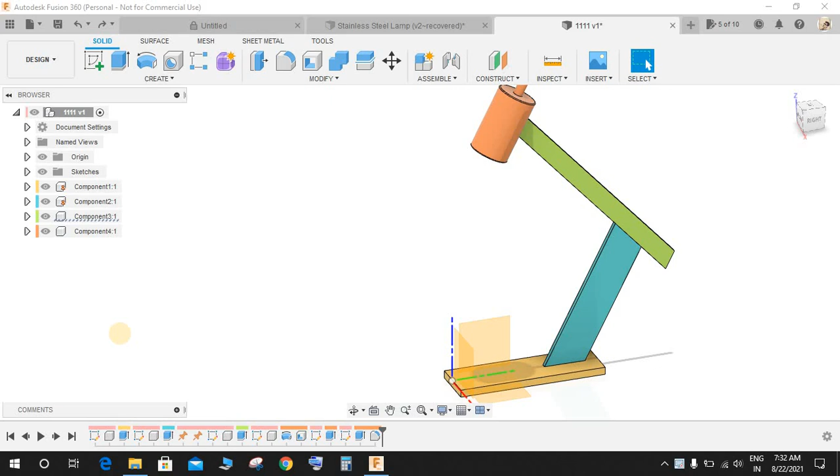So we are making this beautiful lamp assembly here. For till now we have completed all the base, this frame, and the cup holder. Now only thing left is to make this wire, the glass, and the filament. So without wasting any time, let's get started.

Press shift and N to enable the colors. Now what I'm going to do is I will be making the bulb. So for that, go to create a sketch, and on the center plane we will be making a sketch. Just hide the bodies for now, like this.

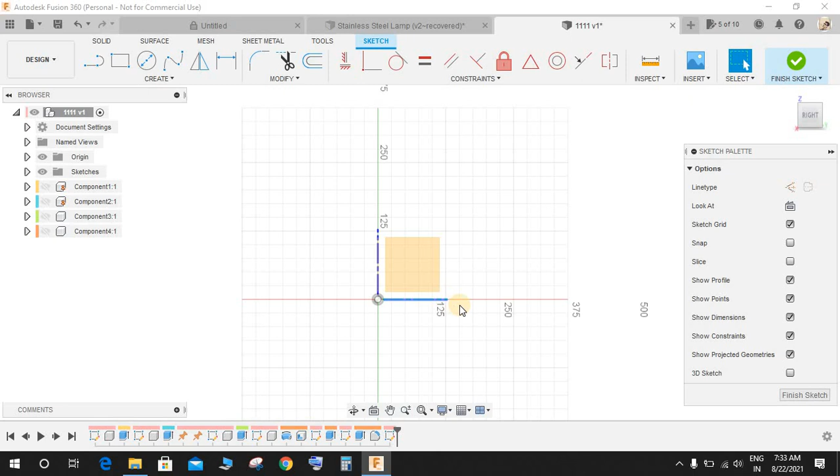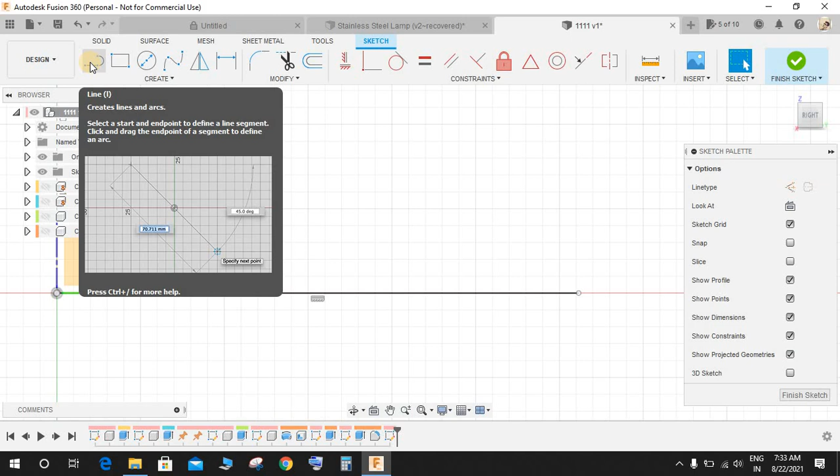Move a little bit here, draw one horizontal line like this, and start by making some sketches. Press line, and somewhere here draw upwards a line like this. Just draw a profile like I am drawing, so like this and this.

Now press D for dimension, give this a dimension of 14 mm, and this one a dimension of 18.5, like this.

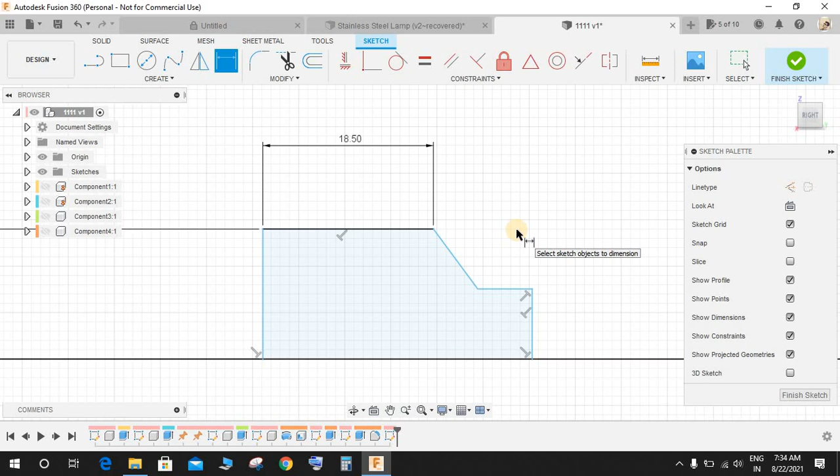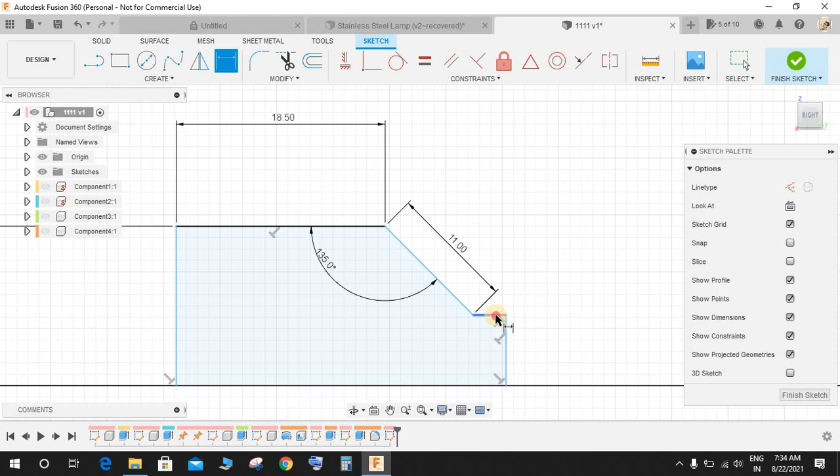And the angle between these two is going to be 135, and this dimension, just delete this, press D again, and this dimension is going to be 11 mm, like this, and this one is going to be 1.5, like this, and this dimension is going to be 6 mm. Of course, it will automatically assign it.

Now once done, go to finish the sketch, click on revolve, select this profile, and axis would be this. This is going to be our new component, and press OK.

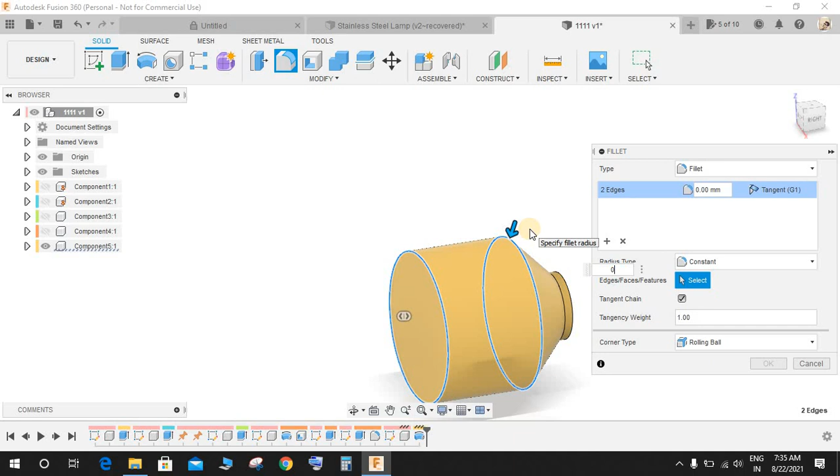Now once done, press F for fillet, select this line, and give this a radius of 0.8 mm, and again go to fillet, select this one, and repeat the same 0.8 and press OK.

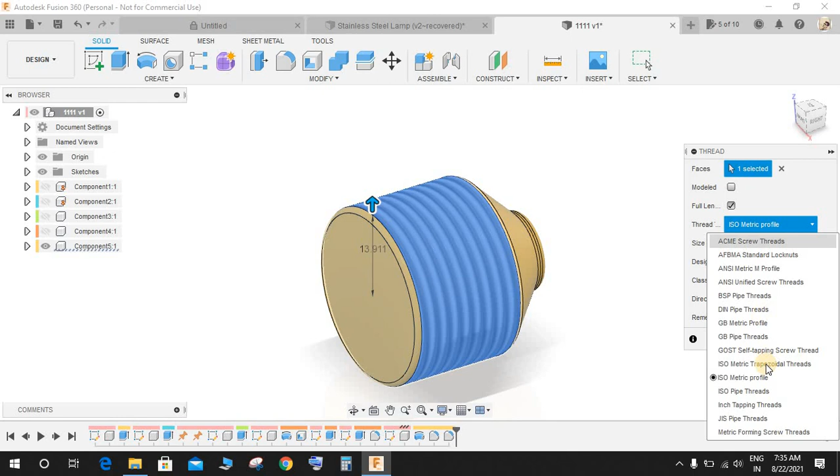Now once done, go to create, go to thread, select this face, and select any profile that you want the type of. I'm going for the GB pipe threads, like this. Remember it to be modeled, and press OK. So now we have a beautiful thread structure here.

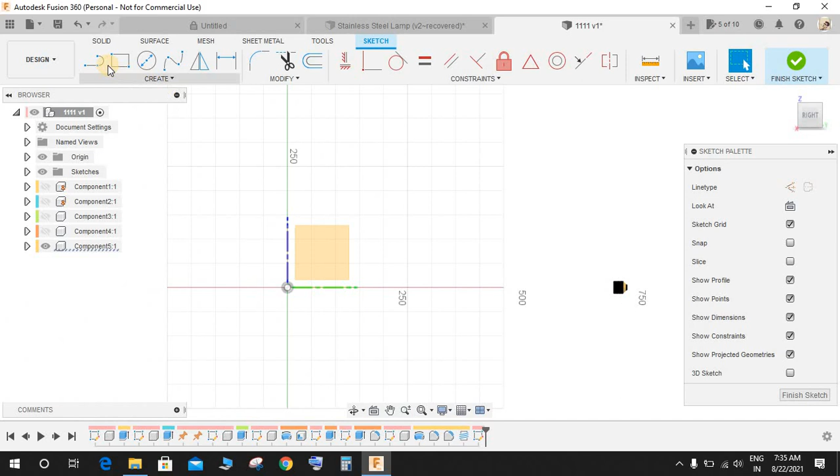Now again go to create a sketch, and on the front plane again we will start by making some lines. So again draw one horizontal line like this, passing through the center of this profile.

Press P for project and project this line like this, and draw a structure like I am doing here. From this point, draw a line like this and join it here. Press D for dimension, length is 27, and this point to this point is going to be 5 mm in distance.

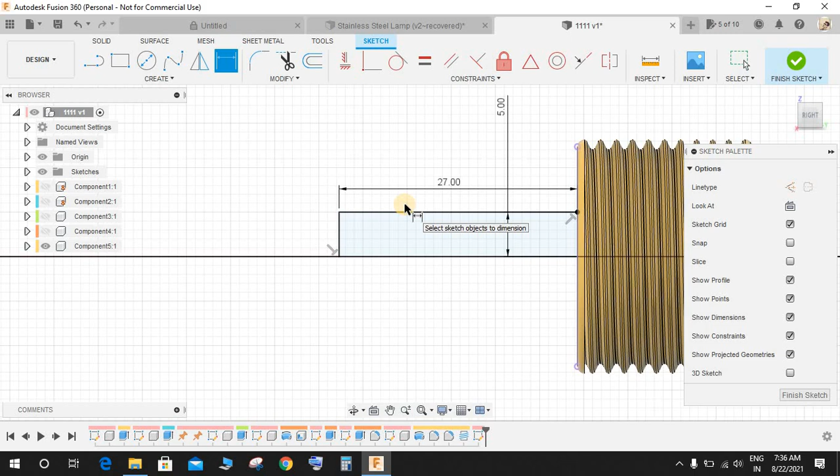So the next thing is to again draw a line like this, and this. Press D for dimension. This is going to be 2.3, and this is going to be 4, like this.

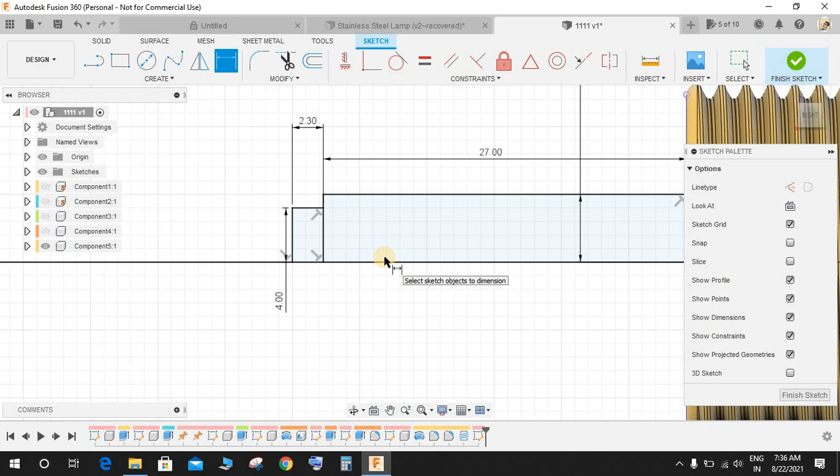Now again make a line, half line here like this. Press D for dimension, and this for this is going to be 7.5.

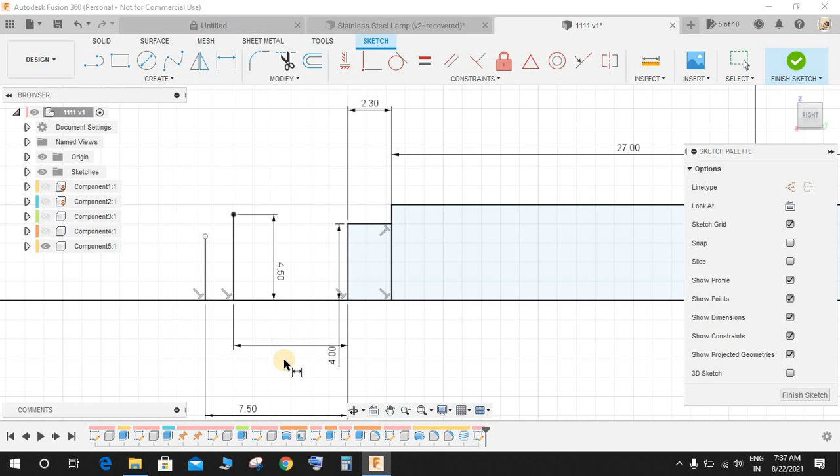Now draw one more line here, press D for dimension and make this 4.5 mm long, and from this point to this point make it 6, like this, of course.

And now go to fit point spline, select this point, and this point, and press OK.

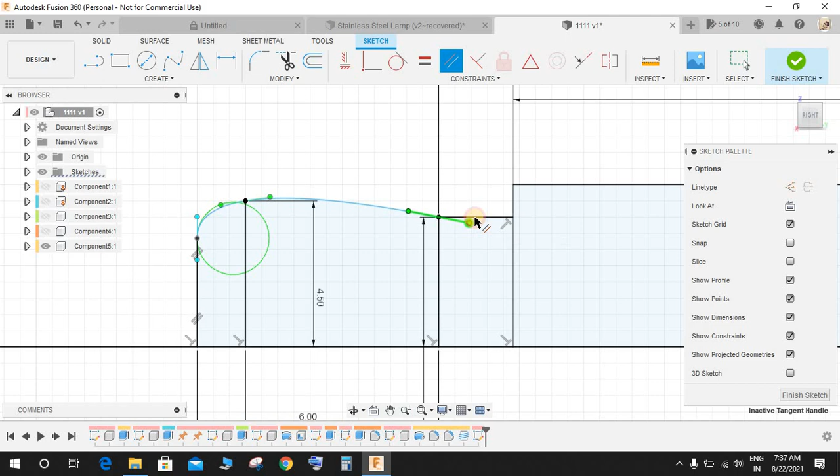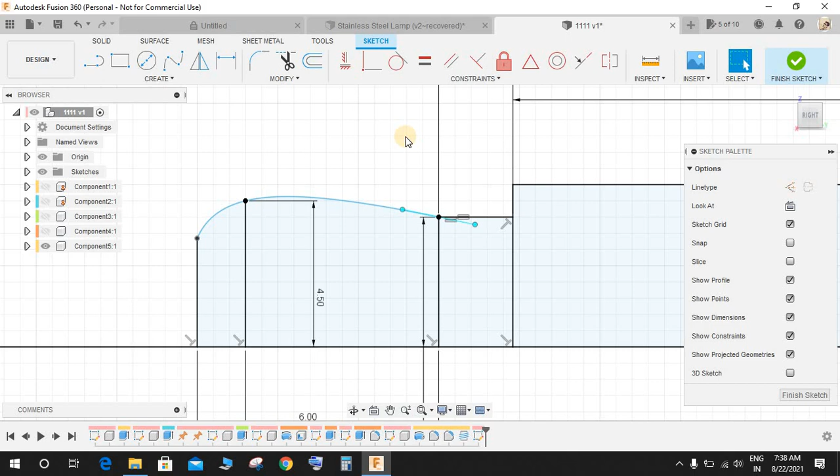Now go to parallel, select this control point and this line, so make it parallel, and this line, no, just undo it. Make a line like this from here, right click and click OK. Now this is going to be parallel relation with this one. No, not equal. Go to parallel relationship between this profile and parallel relationship between this profile, so we have a beautiful curve like structure here.

Now again draw a line from this point straight towards this, like this, and press D for dimension and make this as 40 mm long, and the dimension between this line and this line is going to be 1.4.

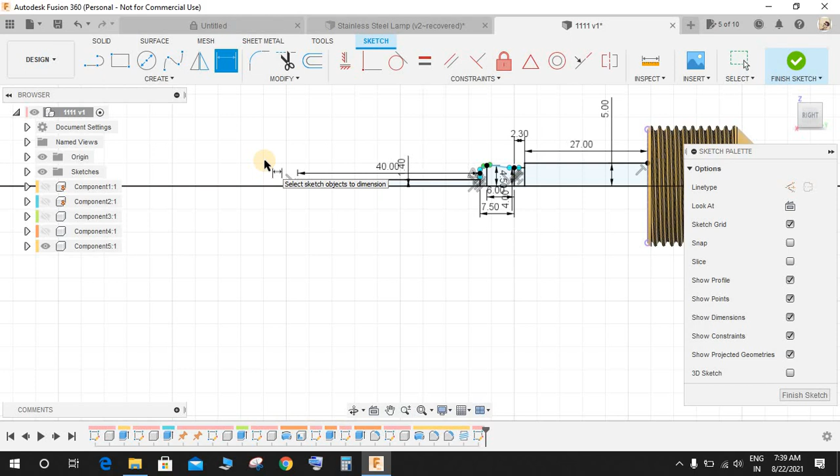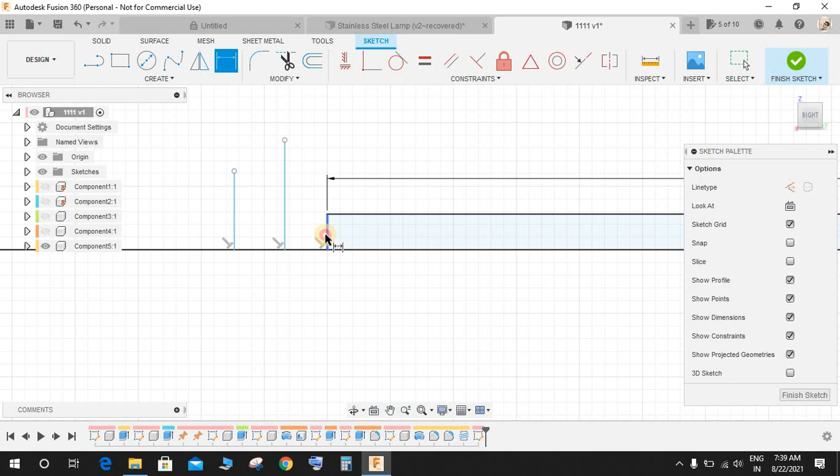Now once done, I'm going to make another line like this, and make another line in the center like this. Press D for dimension, and from this point to the outer line make it 3.5 mm, and the length of this line is going to be 2.5, and the length of this line is going to be 1.5, like this.

Now once done, again go to fit point spline, select this point and this point, and click OK. This time we don't need any dimension, just make it a little bit more curvature, make it parallel like this, and leave this part of the line as it is. Once done, you may finish the sketch.

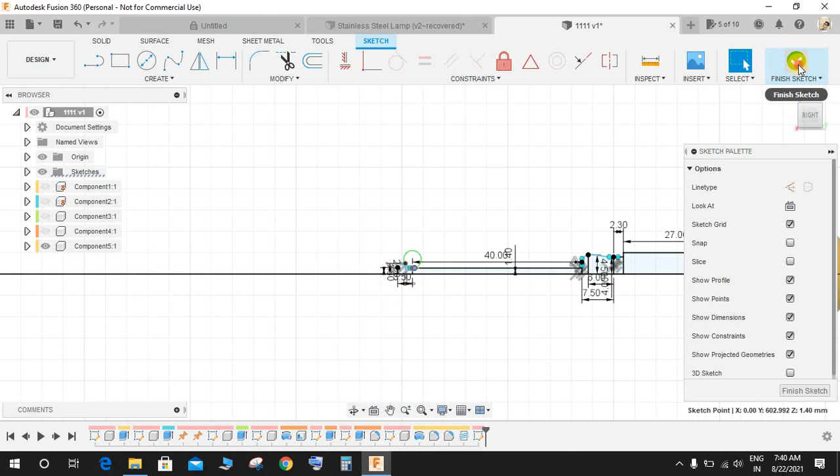Now again go to revolve, select the profile, select all these profiles that we have just created, and the axis of rotation would be this. This is going to be our join operation, and press OK.

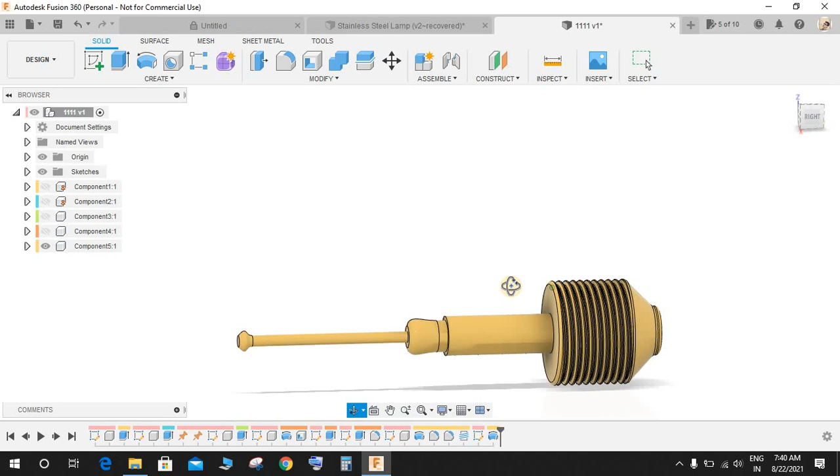Like this, of course. Again go to create a sketch, and on the front plane, start by making a circle somewhere here with a dia of 0.35... okay, 0.4, make it 0.4 mm diameter, like this. This is very small, of course.

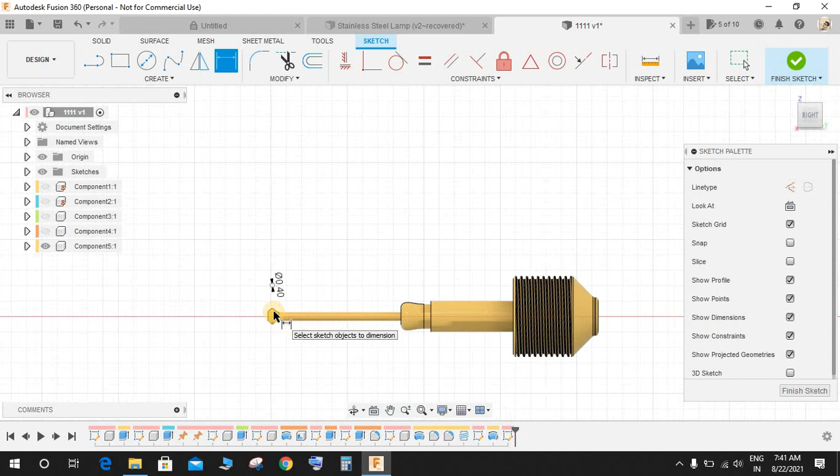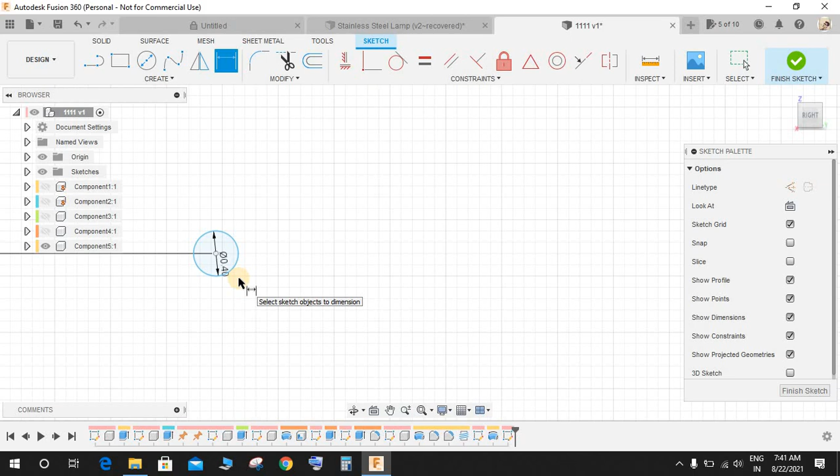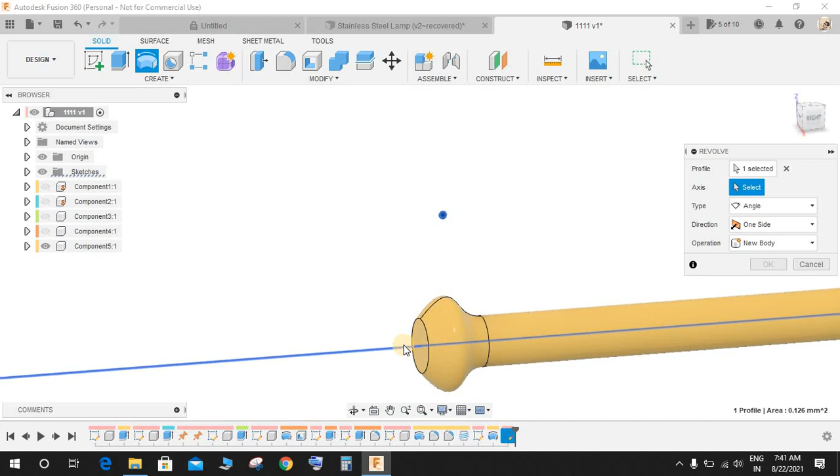Press D for dimension and press L for line and draw a horizontal line from origin, like this, and press D for dimension, and from this line to the center of the circle make it 7.2 mm. The dia is of course 0.4 mm, and the distance from this face to this one is going to be 79. You may finish the sketch. Go to revolve, select this, and the axis would be this, make it a new body and press OK.

Now the next thing is to make the filament. Click on create a sketch, and again on the front plane we will start by making some sketches here. For that, I'm going to click P for project and project this profile here.

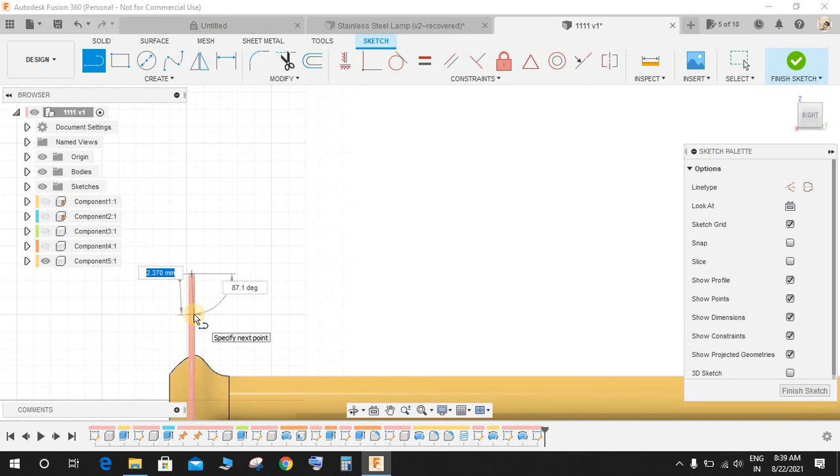Now I'm going to click make a line just on center of this profile like this, and click on slice to slice it like this, and click P for project and select this circle and press OK.

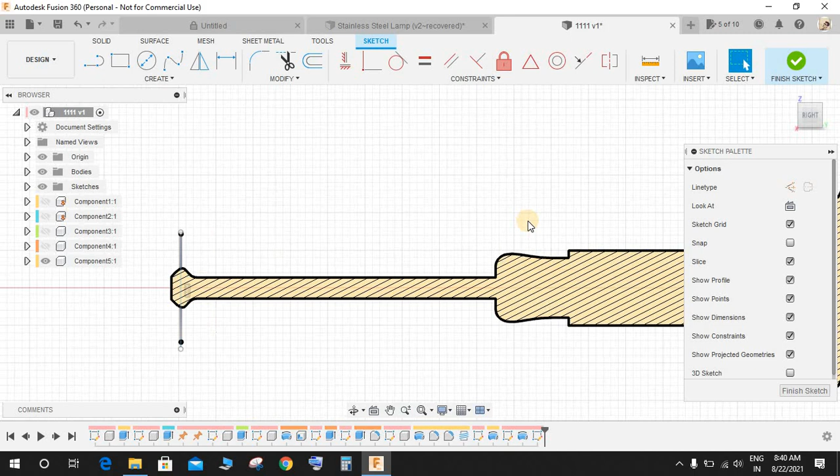Now we will be creating some sketches. For that, click on line and make a line like this. Press D for dimension and give it a dimension of 34 mm like this.

Then go to create, go to point, and make a point here. Press D for dimension and draw one line from origin that will act as a center line. Make a line like this from center, of course. Press D for dimension: from this point to this line, give it a dimension of 10.4, and from this point to this point, give it 6.5.

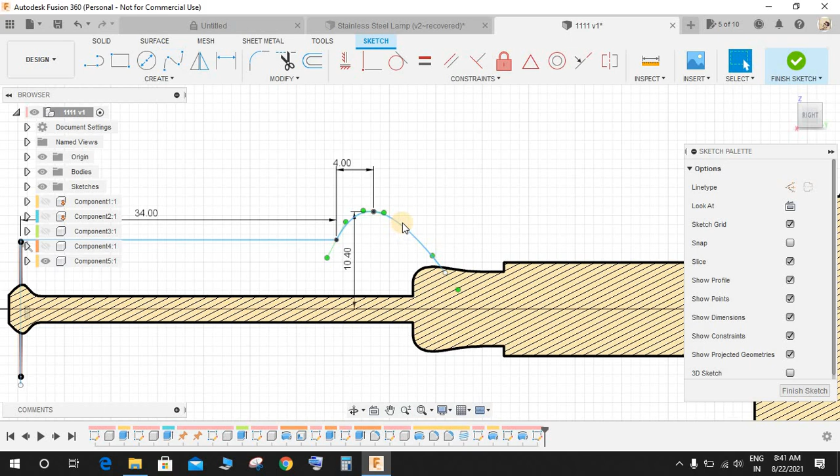Now make it 4 like this. Again, go to fit point spline, select this point, and make the third point somewhere here. Okay, let's make it 6 like this. Make it parallel.

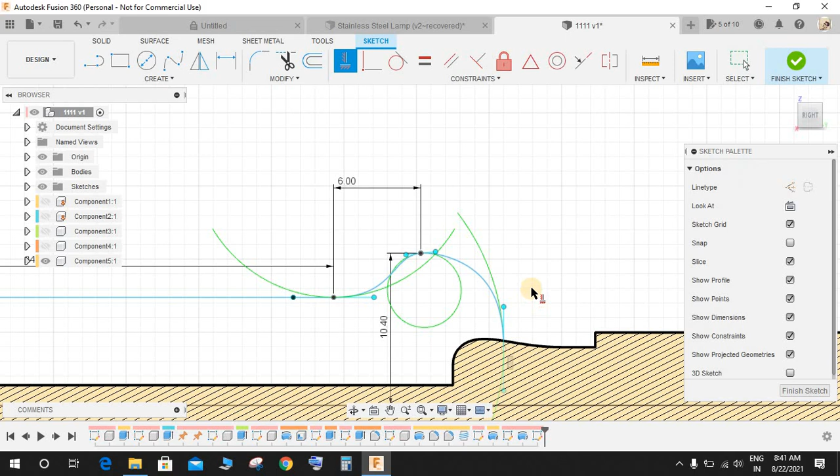From this point, just change - there is absolutely no dimension here, you just need to change it like this - and right click on this and make it vertical, like this. Now once done, make sure that this line comes right on center of this line, just like here.

Once done, delete this line - that line was just for reference. Now this is our line. You can change the orientation like this, and you may finish the sketch.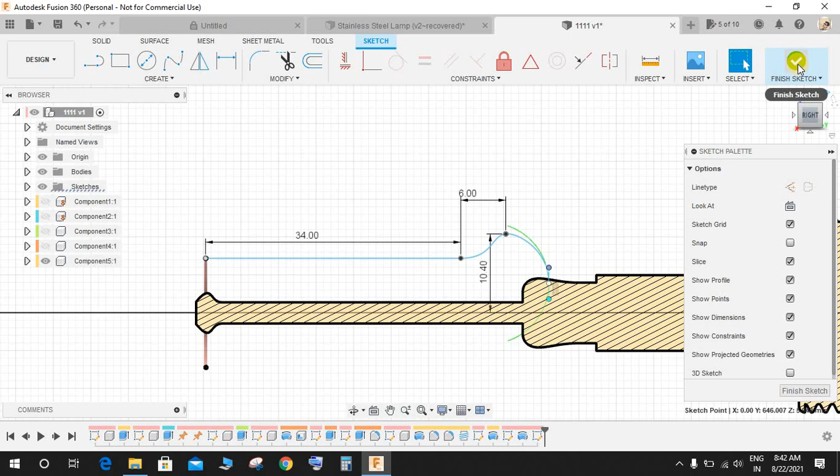Now what I'm going to do is go to create, go to pipe, select this. The operation would be join, and the section size, that means the dia, is 0.35, like this, and press OK. Now we have a beautiful structure here.

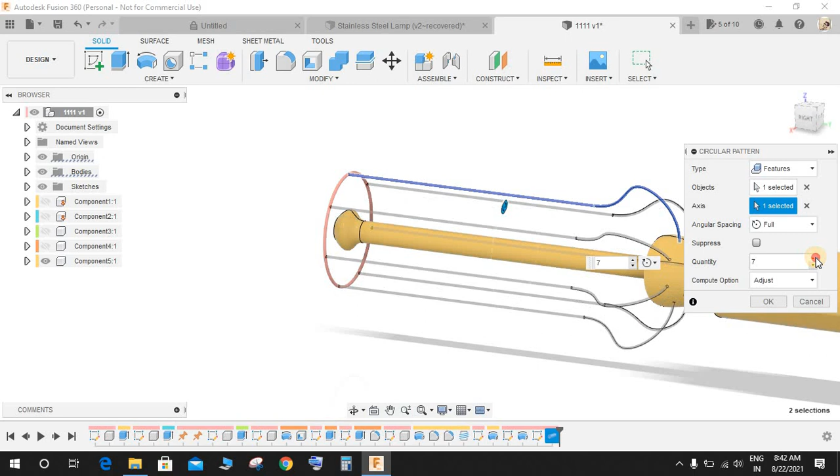Again, go to create, go to pattern, go to circular pattern, and this is going to be our features, and from the timeline select the pipe as the feature, and the axis would be the default axis, and the quantity would be 7, and press OK.

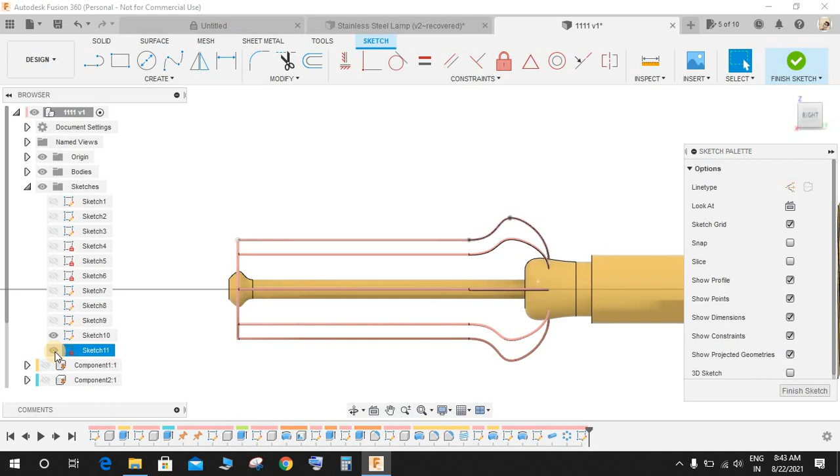Now the next thing is to make the filament. Press create sketch on the center plane, of course, like this, and bring back the last sketch you have drawn - this one was the last sketch that we have drawn. Now click on project and project this line here and press OK. You may hide this body for now, as we don't need it right now.

Again, click make a line. Remove project and select the sketch entity as this one. I don't know why it's not selecting. Okay, let's make it like this. Draw a line like this, don't project it.

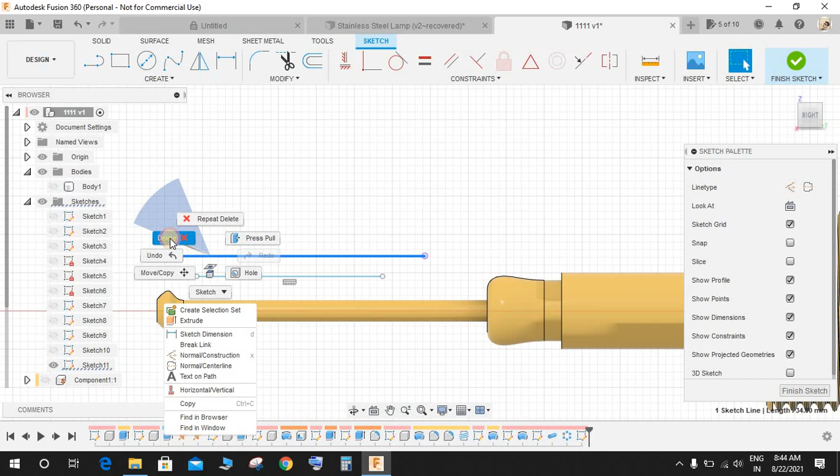Just hide it, I have made the sketch hidden. So what I'm going to do is delete the projected line, select it, delete it, and bring back that sketch. Now go to coincident, select this line and make it coincident with this point.

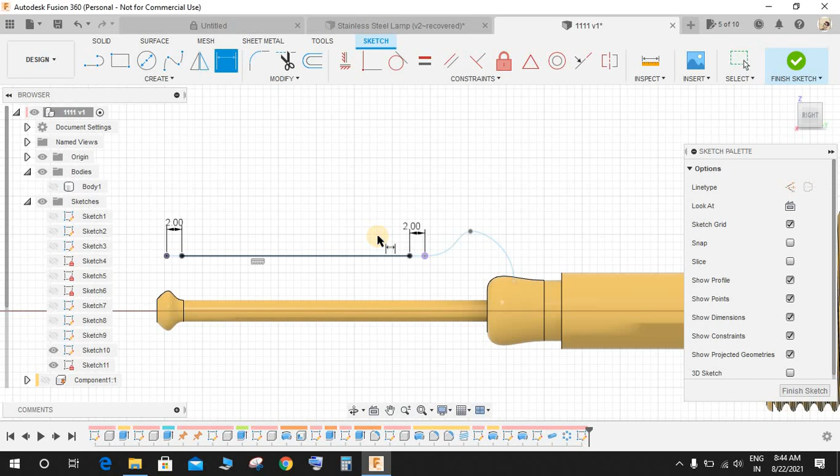Now again press D for dimension. From this point to this point, give this a dimension of 2 mm, and from this point to this point, give this a dimension of 2 mm. Once done, you may finish the sketch. Now we have a beautiful line here.

Just hide the previous sketch and bring back the body. Hide the body for now. Go to create, go to pipe, select this line, and this time the section size, the diameter will be 1.1 mm. Bring back the body and the operation would be join, like this.

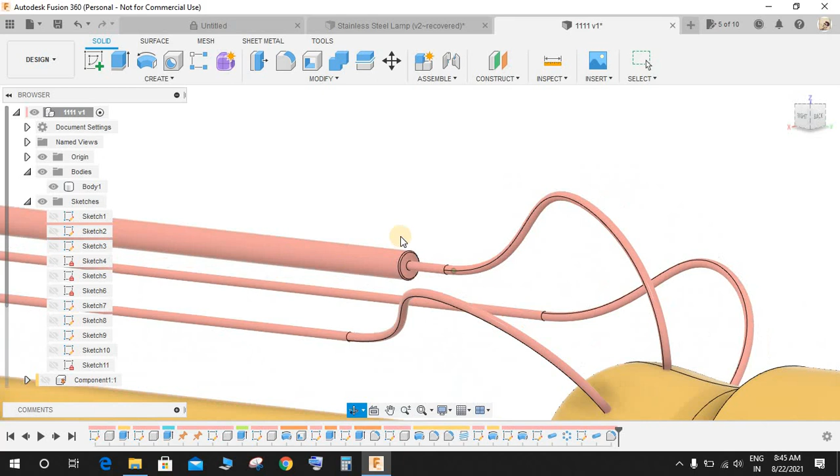Go to fillet, select this edge and this edge, and the radius will be 0.05, or make it 0.1 mm. Let me just change it, make it 0.1 mm. I think this is also too less.

Click on feature, yeah, 0.25 would be okay.

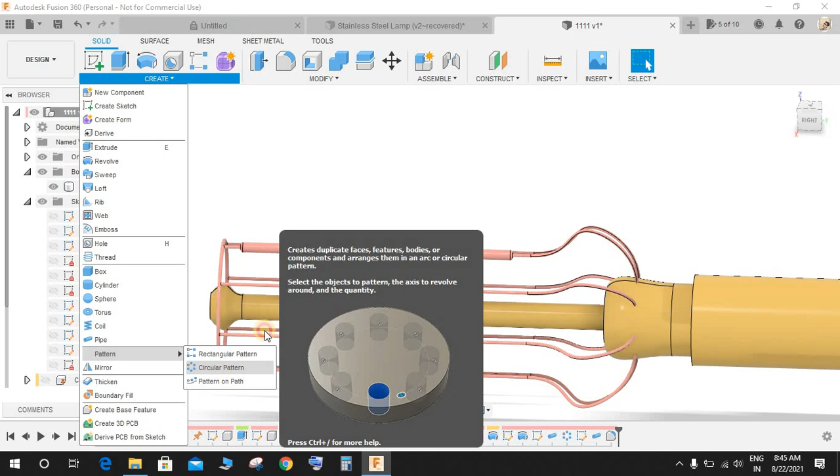Now again repeat the same step. Go to create, go to pattern, go to circular pattern, go to features and select the pipe, and the axis would be this one. This time also make the quantity as 7, and press OK.

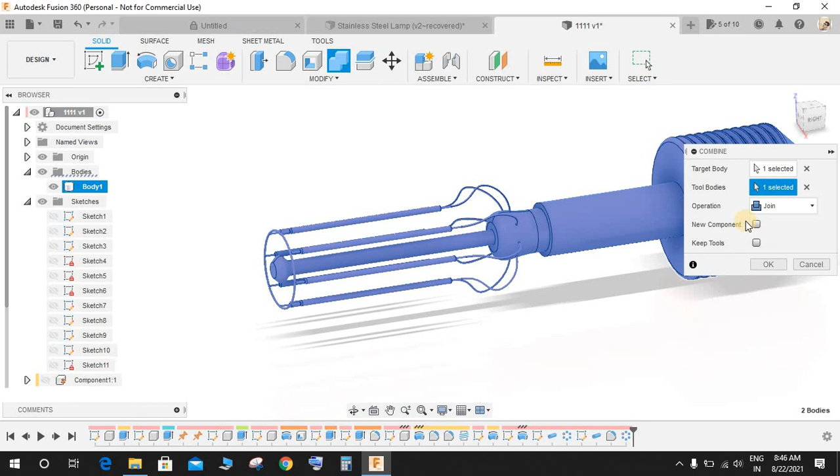Now we have one body here. Go to combine, select this body with this body and make it a new component, and hide this body. We have a new component here.

Now bring back all the objects that we have created earlier. The only thing left is to make the glass out of the bulb. So for that, again go to create and first go to the plane, the bottom plane, and we will start by making some points.

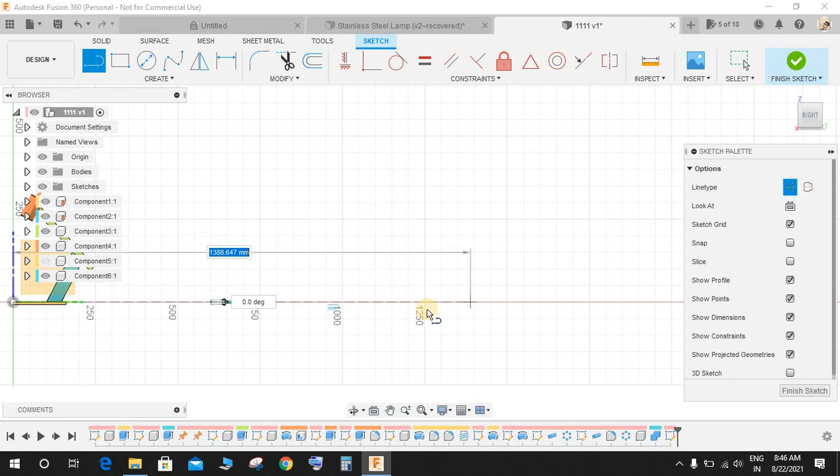First of all, make a line, a construction line from origin, make it construction mode, and draw a line like this. Create a point on this line and give it a dimension from this surface as 113 mm, like this.

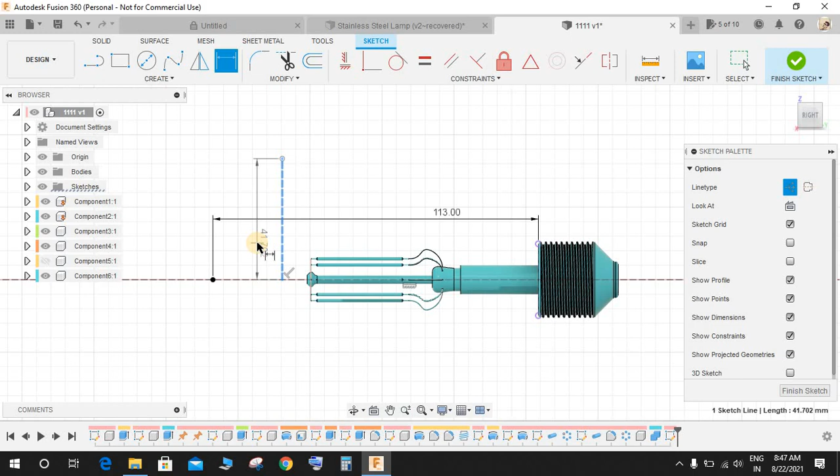And again click on line. This is going to be our construction line as well. Press D for dimension and give this a dimension of 30.5, like this, and from this point to this one, this is going to be 88 mm, and this.

Now click P for project and project this circle right here, and press OK. Now we have a line here. Again go to...

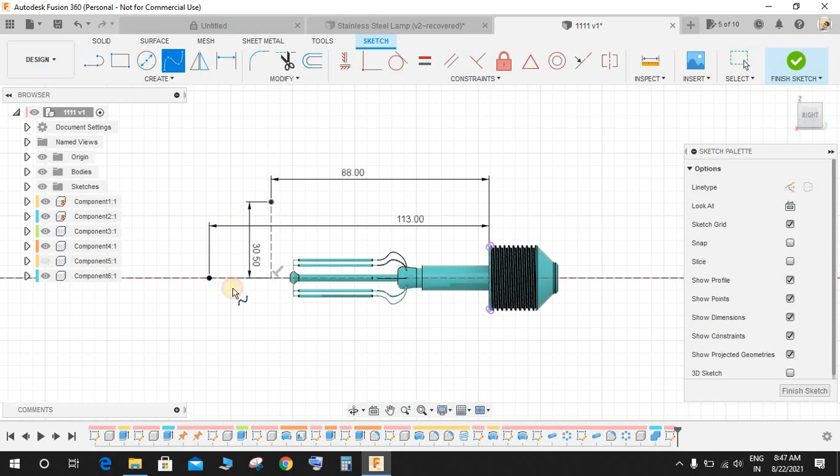Fit point spline, from this point to this point, just hide it. Undo the construction mode to this point, make a line like this. Let's repeat it from this point to this point and to this point, and OK. Now decrease it like this.

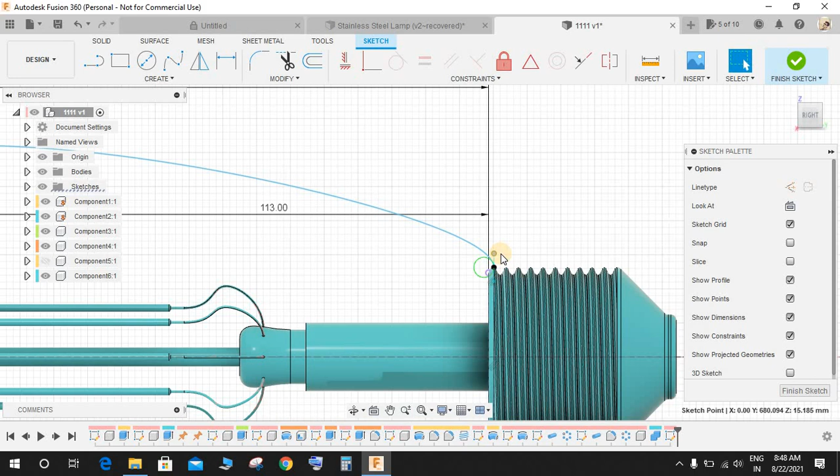Make it parallel to the line we have projected. Now decrease this like this, press D for dimension and make the dimension length of this line as 3.5. Make it small.

Now click on, select this line and make it vertical like this. Once done...

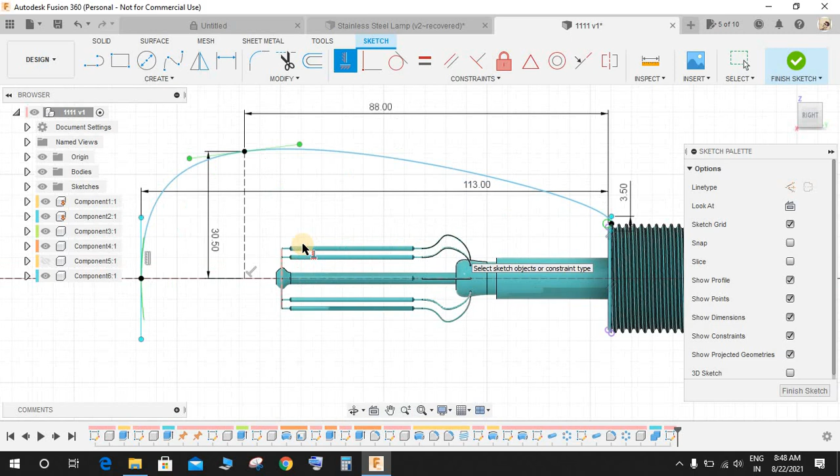Click on lines, select from this point to this line, and just hide the rest of the component for now, so that we may have a close sketch. Place a line from this point to this point and we have a closed sketch.

Finish the sketch, bring back the previous body. This is going to be our revolve. The axis would be the baseline and the operation would be new component. Press OK. Now this is the bulb that we will be making.

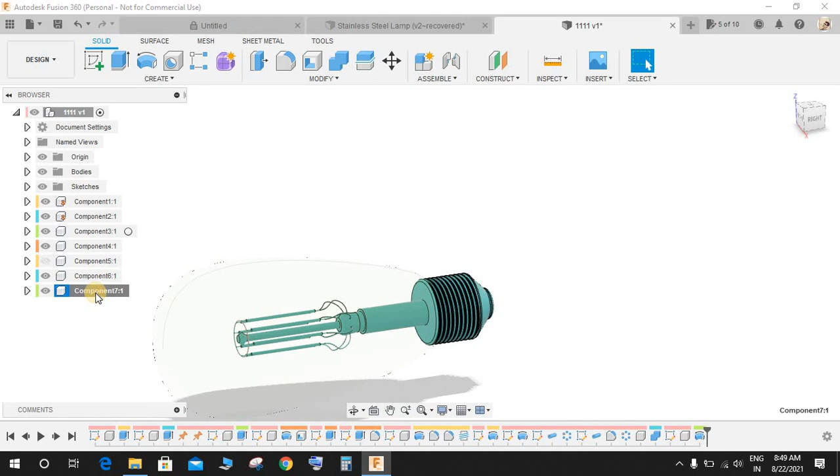So right click on it, click on opacity control and make it 10% to make it transparent. Okay, this is too much, so let's go to 70%. So this is going to be our bulb.

Now just hide this component. We are going to make it hollow. So for that, to make it hollow, just hide this for now.

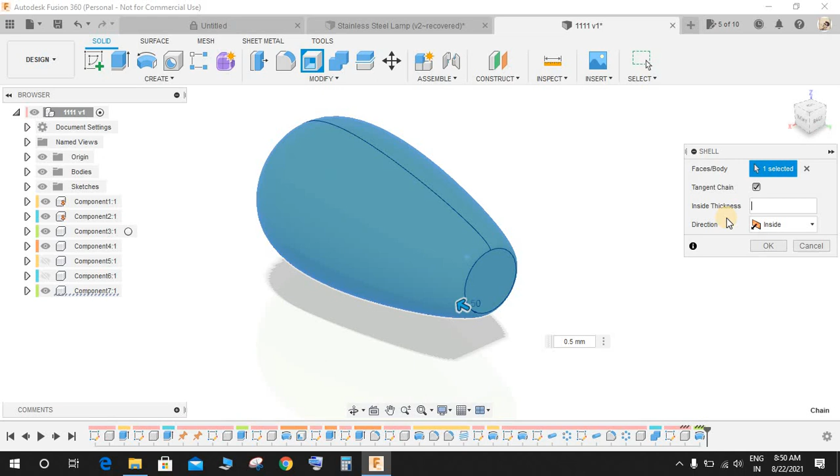Now what I'm going to do is go to shell, select this body, and make the inside thickness 0.5 mm thick, then press OK.

Now go to extrude and extrude cut a hole on this so that we may see the thickness here. Now just hide the body. So we have the whole filament and we have the bulb here.

Now go to assemble, go to rigid joint between these two components and press OK. Now if I just move one component, the other will move automatically.

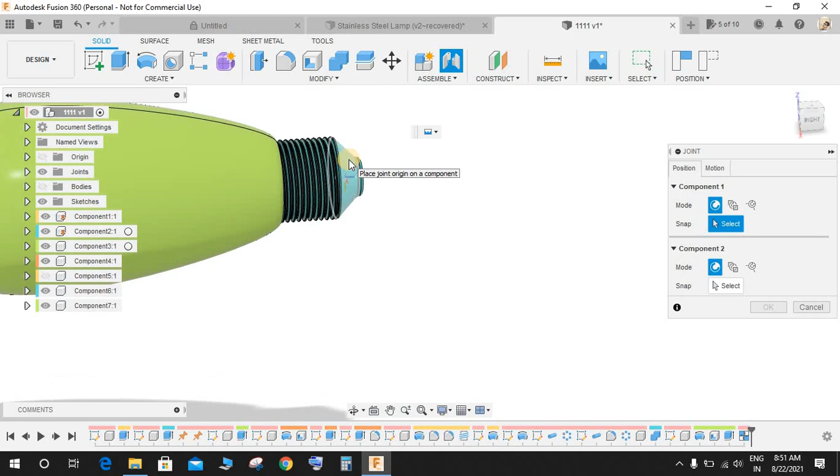Now just hide the origin like this. What I'm going to do is assemble this to the center of this. So for that, go to joint, and for the position, click on the center of this.

And snap it to the center of this, so it will automatically be assigned. Now click on the right view and drag it upwards like this and press OK.

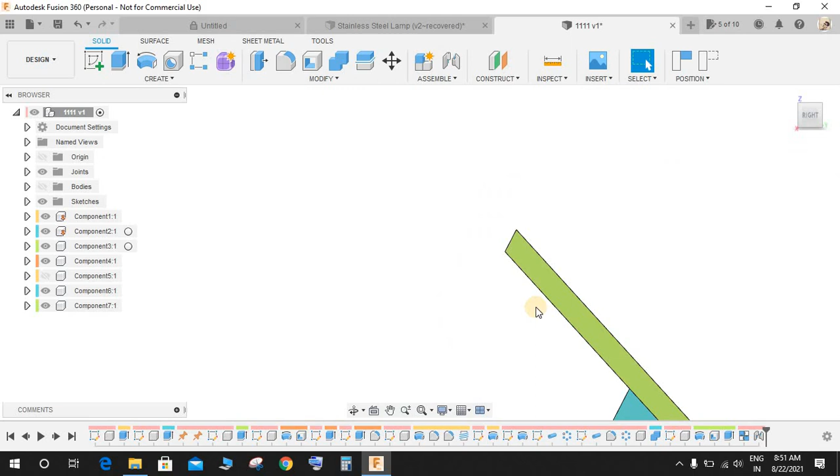Okay, something is wrong. I need to delete this rigid group joint.

Okay, just edit the joint and make the motion as sliding and press OK.

Okay, something must be wrong, so just delete both of these sketches. What I have done wrong here, just undo it like this.

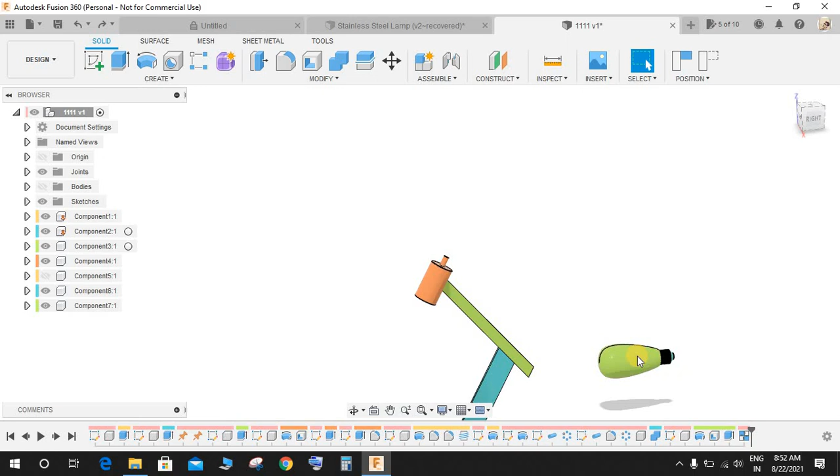Now what I have done here, basically when I created the joint, instead of moving the bulb filament, the holder got moved from here to here. So what I'm going to do is right click on the holder and click on ground.

Now it won't be able to move. Click on joint, snap to the center of this bulb and snap to the center of this point.

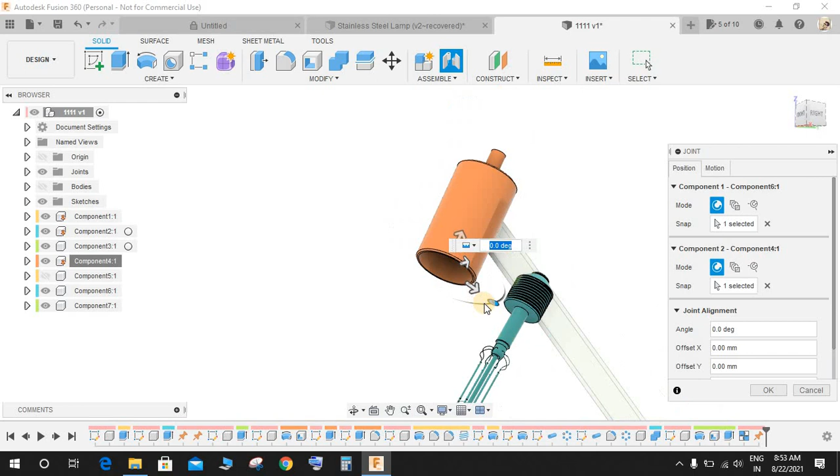Right click, go to the right view and drag it upwards, and this is going to be a rigid joint, press OK. Now we have a bulb in the area.

Now again we need to move it a little bit more upwards, so just move it more upwards like this, and now we are done with the bulb.

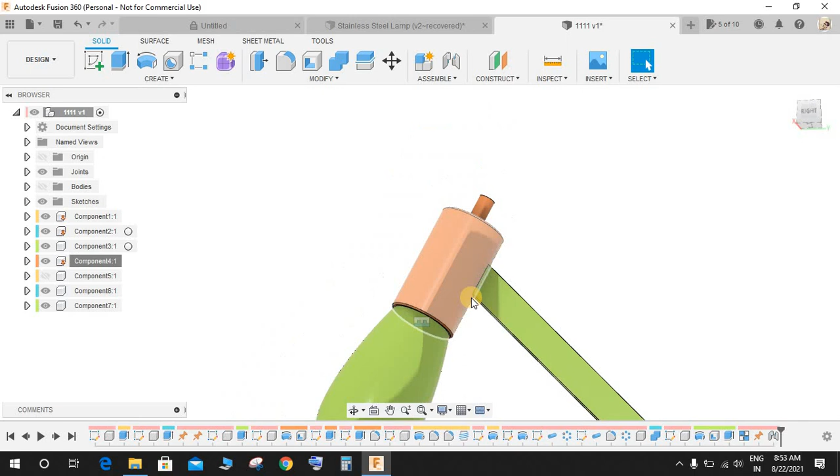Now the only thing left is to make the wire. So for the wire, go to create the sketch and select this plane, create one hole here. We don't need any dimension for that right now.

So this hole would be of 8.5 mm diameter, press enter, and location is not necessary, so just draw one hole here.

Extrude cut it through the body, press sketch, press C for circle, and make another hole here of diameter 8.5, make it in the center.

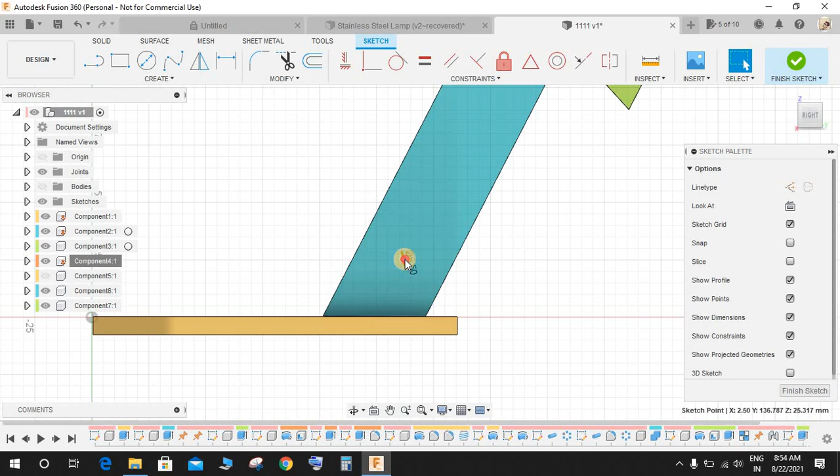We don't need any dimension here, so just sketch and extrude cut here.

Now again go to construct, go to axis through cylinder/cone, select this one and create an axis in the center, then right click drag upwards and repeat here.

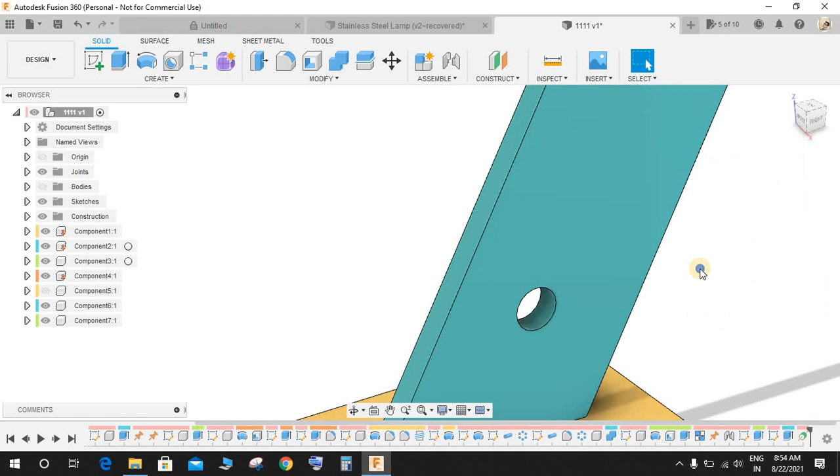Now again go to construct, go to point at center, select a point here, right click drag upwards to repeat the command and select a point here.

Now repeat the same here, select and drag upwards, make a point here, and again construct axis through two points, make a line here. What I'm going to do is make a wire.

Okay, let's just hide the joints for now. Go to sketch, select any plane you want, rotate the view and click on 3D sketch.

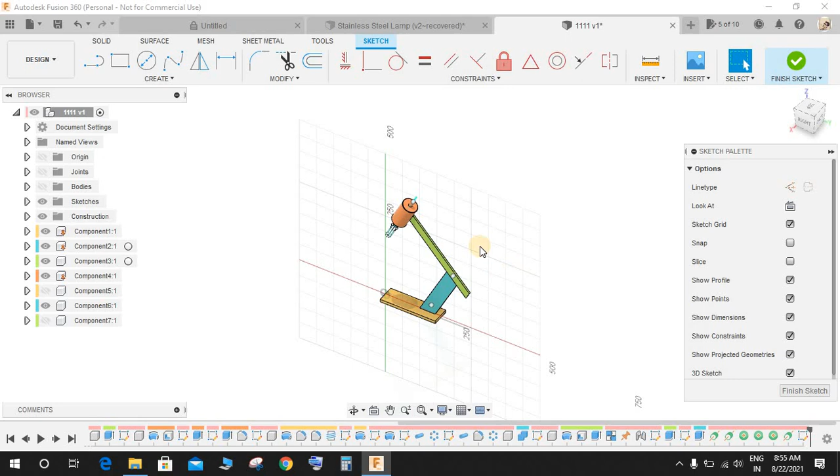Now go to spline. From this very point, select the point we have created and start making a sketch in 3D.

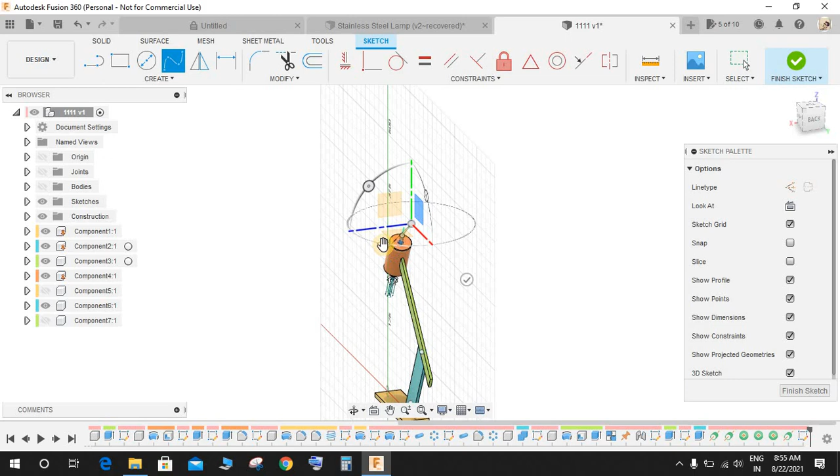So rotate this line like here, go towards here and go a little bit to the bottom, and again on this point, just rotate it. This is without having any dimension, you just need to create a 3D sketch.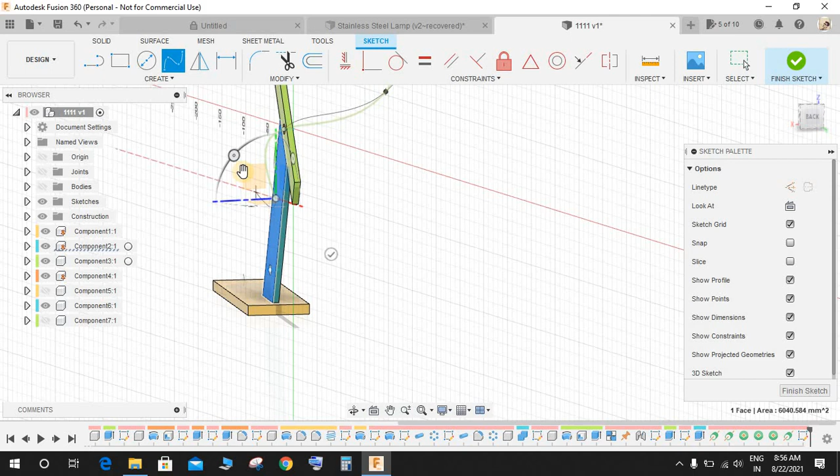And select this point, and another one would be here, and another one would be here, and press OK.

Now I'm going to give some constraints. So the first constraint is going to be parallel. Select this line and this axis to make it parallel.

Now the other constraint would be from this point, so make it parallel like this. The third one would be from here, so make it parallel to this one like this, and you may finish the sketch.

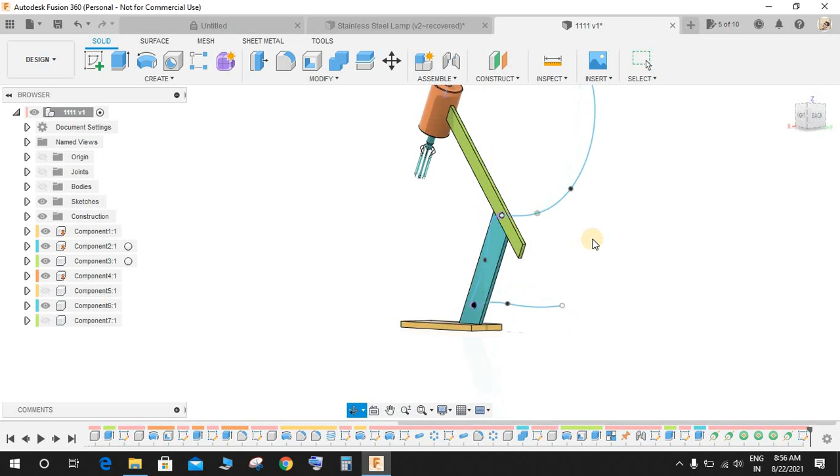Now to modify the sketch, click on the move command, select the sketch as sketch objects, select this point and move it upwards. You can drag it like anything you want, it is all up to you.

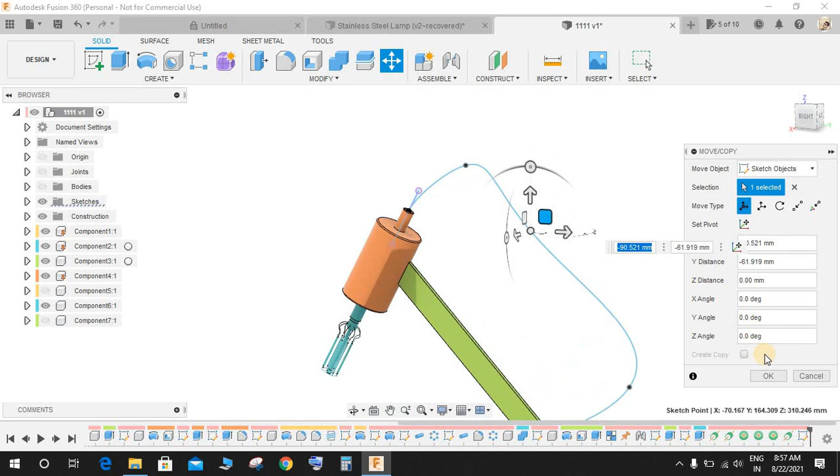For example, I want it to be moved like this, and press OK. Now once you are satisfied with the sketch, go to pipe, select this. This is going to be our new component, the section size would be circular and the diameter would be 8, then press OK.

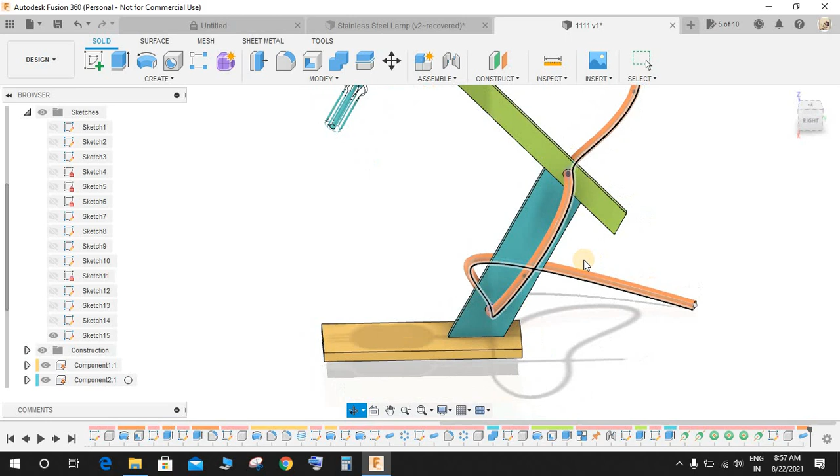So this is the wire that we want. Also, if you bring back the sketch, if you want to modify anything in it, it will automatically update the wire. For example, if I press on move and select this point and drag it upwards or downwards, it will automatically change the shape of the wire.

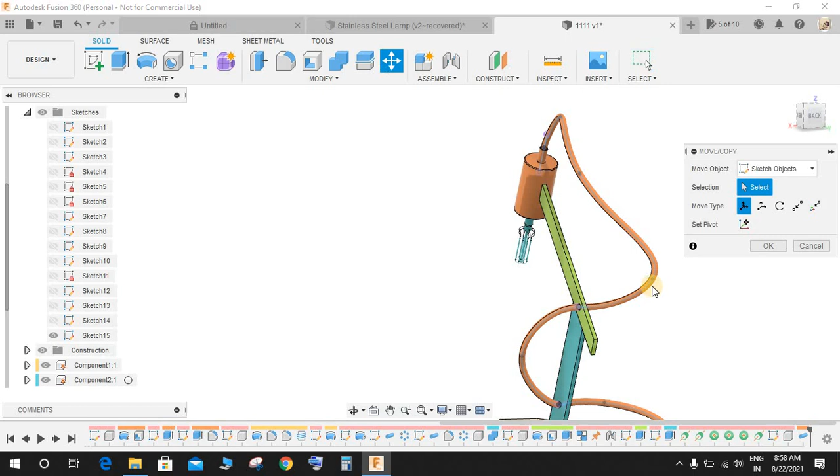So let me just shift this point towards here, yeah, like this, and press OK. So we have a wire here. Again press move, I am going to change this point also. Yeah, this looks fine. Now just hide all the sketches.

Bring back the bulb here. Now I'm going to give it some appearances. For that, press shift and N to disable the automatic color generation. Now press A for appearance and wait for the appearance toolbar to open.

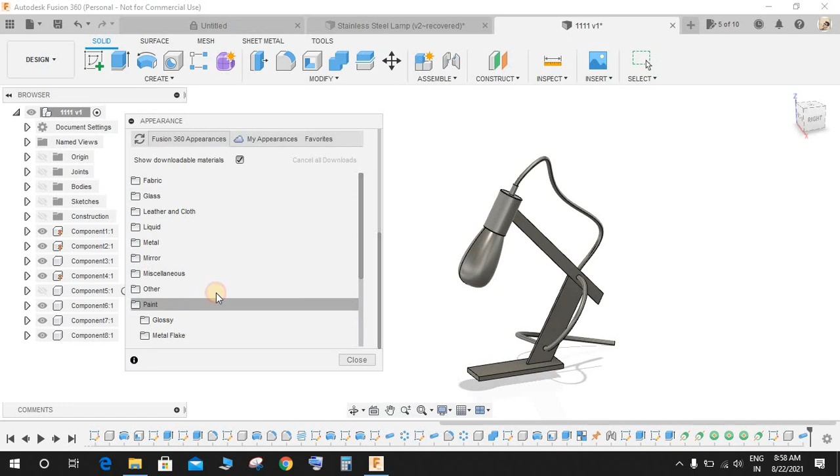Now it's up to you guys to apply whatever appearance you may like. For that, click on body and component. We will go to some paints, and we will be using some metallic paints. Let's say the base would be red, the frame would be blue, the top portion would be yellow, and for the frame, let's say we want it white.

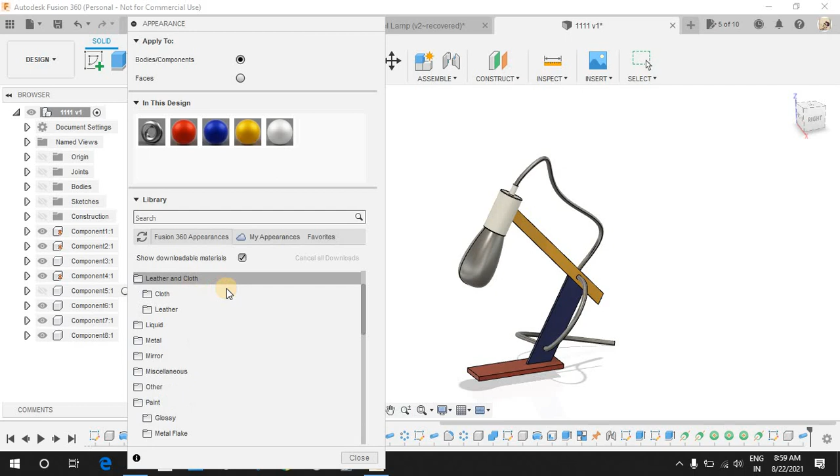Once done, for the wire, we will go to leather and cloth. Let's make it some fabric appearance. Yeah, so you can see that it now has a beautiful fabric appearance. As for the glass, we will go to glass, smooth, and here are the different colors of glass. We will go to clear glass like this, beautiful.

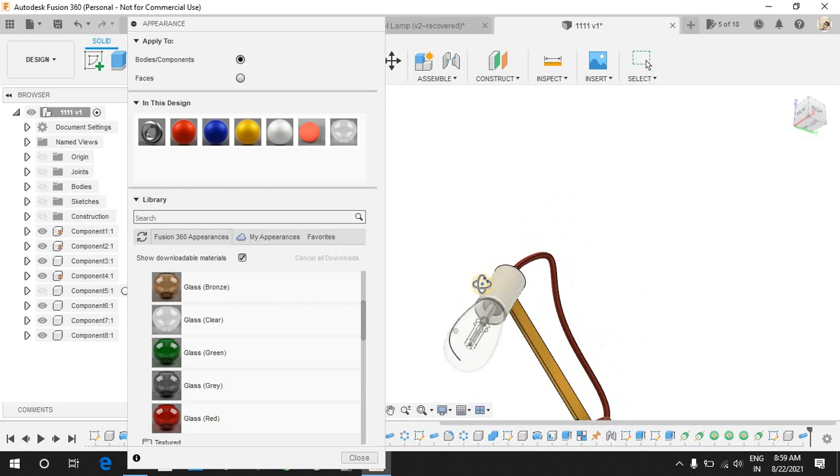Now just hide the glass for now, because we will be doing the filament. For the filament, go to metal, go to brass or bronze. I am going to make it a polished brass. No, the bronze will look good, so let's make it polished bronze like this, or you can choose any from copper.

Okay, let's go to copper. Polished copper would be nice. And as for the filament, this item needs to glow. For that, click on faces, because we will be providing the light on the faces. Let me just search where they are.

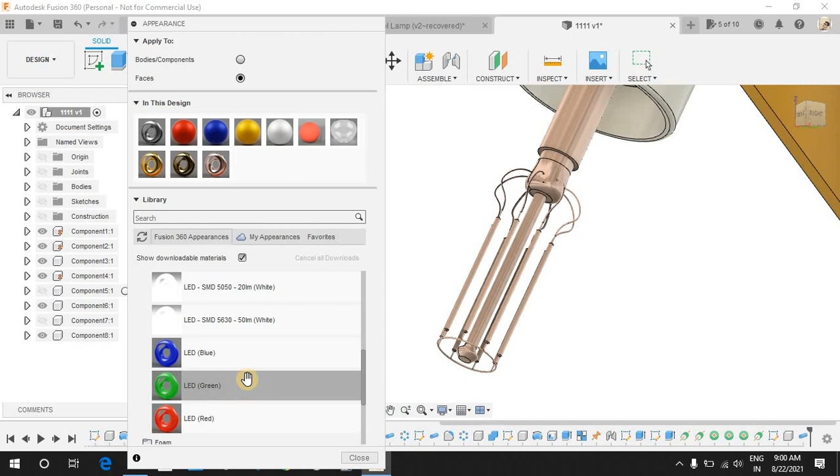Yeah, go to other, no, not this one. Let me just check, go to miscellaneous. Miscellaneous comes with air, gemstone, foam, emissive. Yeah, here it is, the bulb and all the different LED lights. Let me go with the 50 lm white, and make sure the face is selected and every face should be given one light. Okay, I don't know why it's not working.

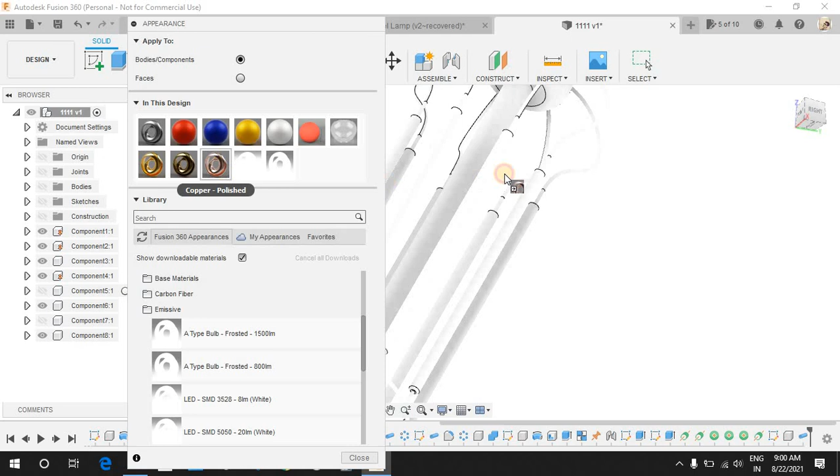Okay, I don't know why it's not working. Let me just check, maybe there's a glitch in the application. Again, go to create appearance by pressing A and make it a face. Let's zoom in a little bit and go to this one. I don't know why it's not applying, maybe there's a glitch in Fusion. Okay, this face got selected, but I don't know why the rest of the faces are not getting selected.

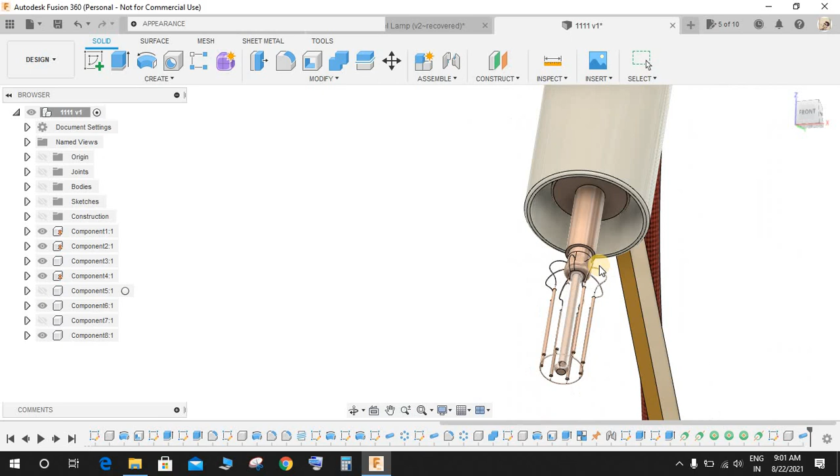Let me just try it one more time. Okay, so definitely there's a glitch in Fusion 360, because one of the filament faces got enlightened, but the rest are not. So just bring back the glass here, and let me go to display and switch the environment to dark sky. That will look great. So there's a glitch, but I think you guys can manage that easily. It's just the appearance that requires the filament to glow.